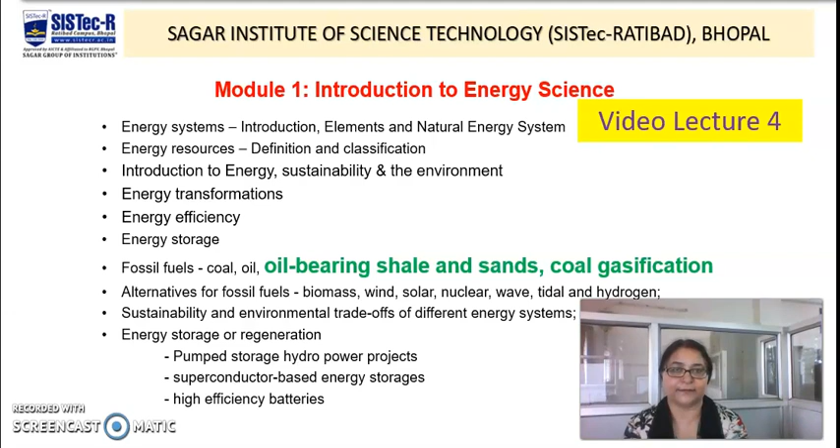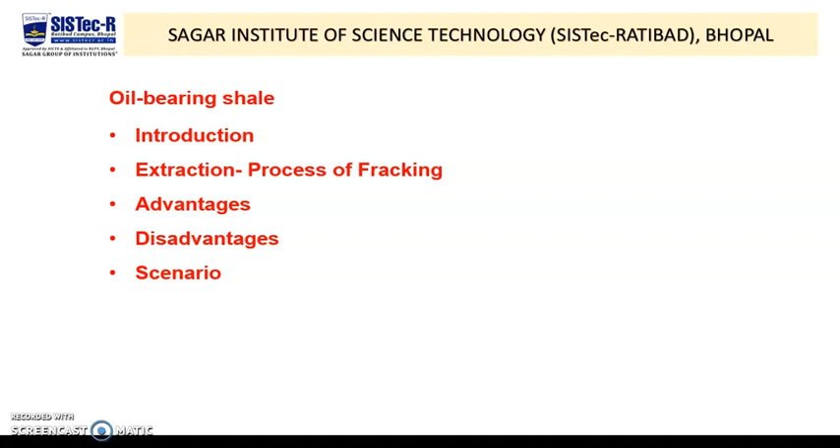Next topic is oil bearing shale. We will discuss its introduction, extraction, process of fracking, advantages, disadvantages and scenario. Now introduction. Oil bearing shales are underground rock formations that contain trapped petroleum.

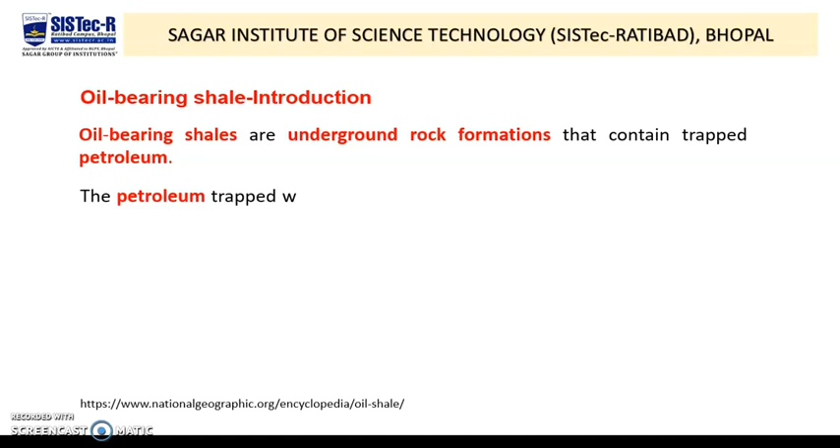The petroleum trapped within tight geological formations with low permeability and low porosity is known as tight oil and it is difficult to extract.

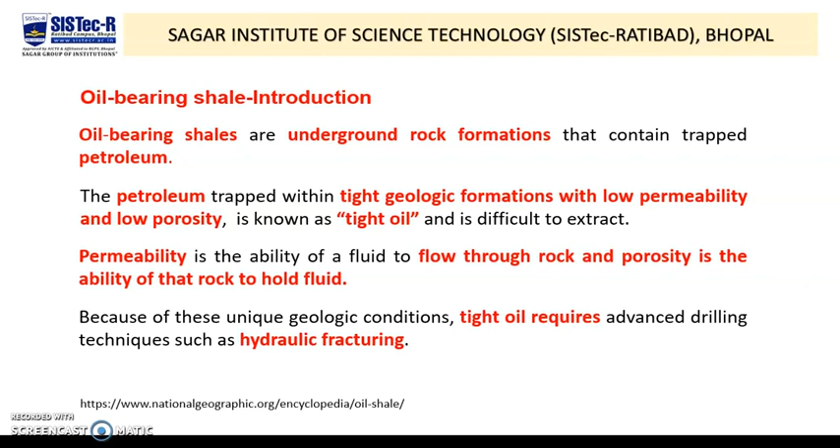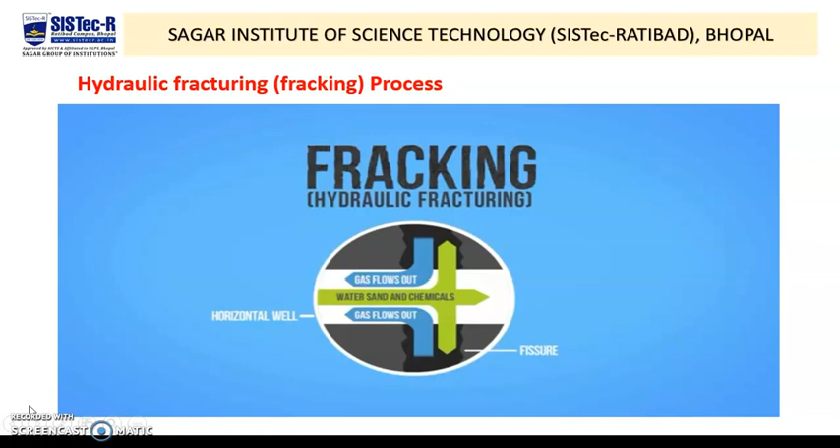Fracking. Hydraulic fracturing, or as it is commonly called, fracking, is a drilling technique used for accessing natural gas and oil in tight geologic formations. The process involves the horizontal, directional drilling of wells, as well as the use of water, sand, and chemicals at high pressures to fracture rock and release hydrocarbons. The hydraulic fracturing process can be summarized into the following steps.

A well is drilled vertically to the desired depth, then turns at an angle and continues horizontally for several thousand feet into the formation containing the trapped natural gas or oil. A mixture of water, sand, and chemicals are pumped into the well at high pressure in order to create fissures in the rock, which increase permeability and allow the hydrocarbons to escape. Natural gas or oil is released through the fissures and is drawn back up the well to the surface.

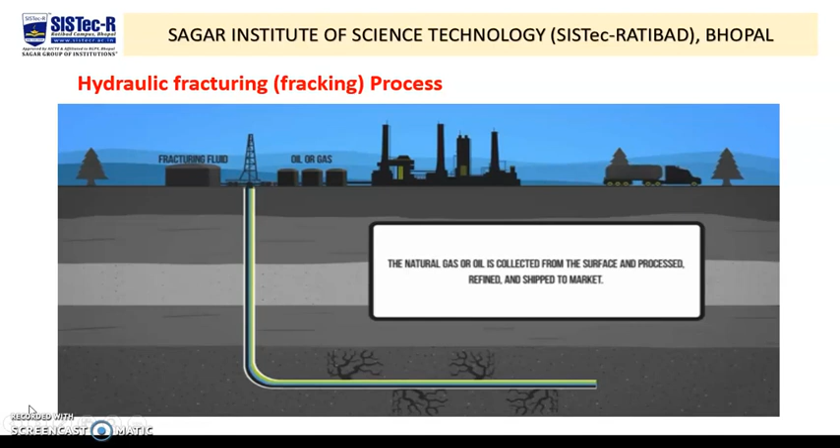Wastewater, also called flowback water or produced water, returns to the surface after the fracking process is completed. The natural gas or oil is collected from the surface and processed, refined, and shipped to market. Water and sand make up 98% of the fluid used in hydraulic fracturing. In addition, chemical additives are used, but the exact formulation varies depending on the well.

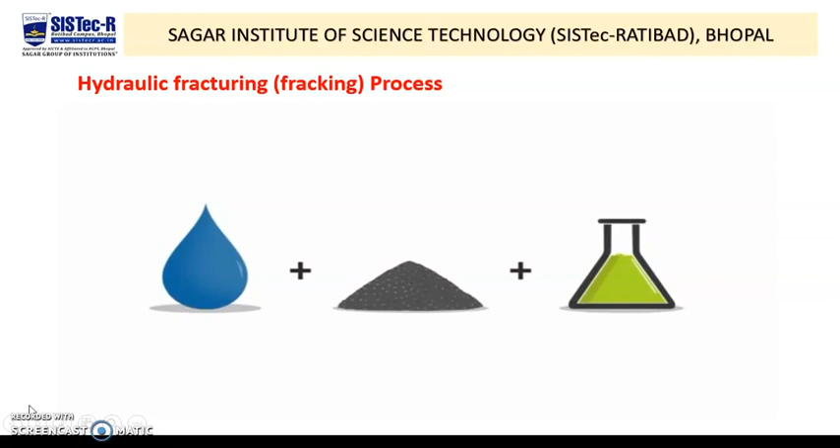Because of the advances in the fracking technology, oil and natural gas that were previously unrecoverable are now accessible. This has led to an increase in supply of both oil and gas in the world market and has meant greater energy independence for those countries, such as the United States, that can now access an abundance of these resources. However, the development of fracking has been controversial due to environmental concerns.

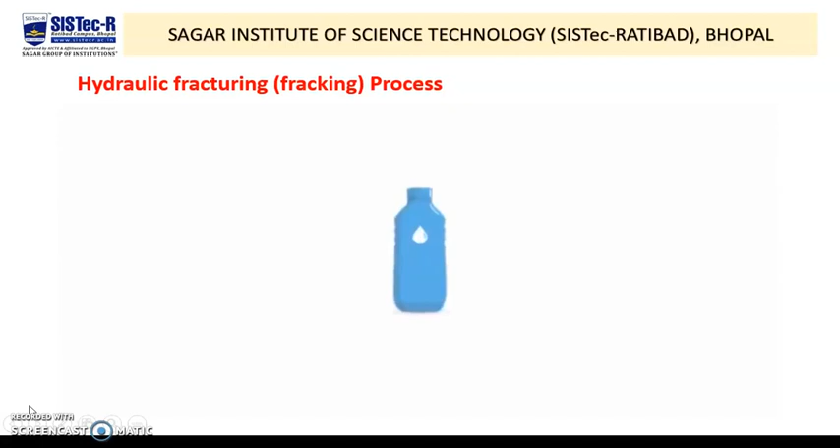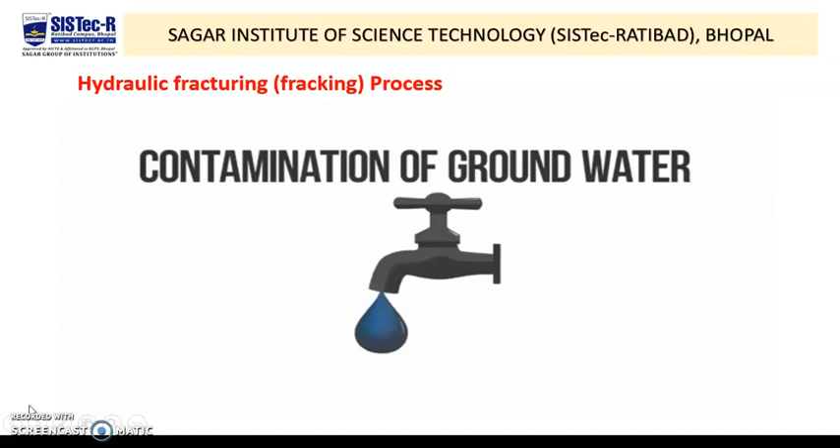The process typically requires 11 million liters of water per well, but can vary greatly depending on the characteristics of the geologic formation. Other environmental concerns include contamination of groundwater, depletion of fresh water, and surface pollution in the drilling process. There are also concerns linking fracking to enhanced seismic activity. That's fracking.

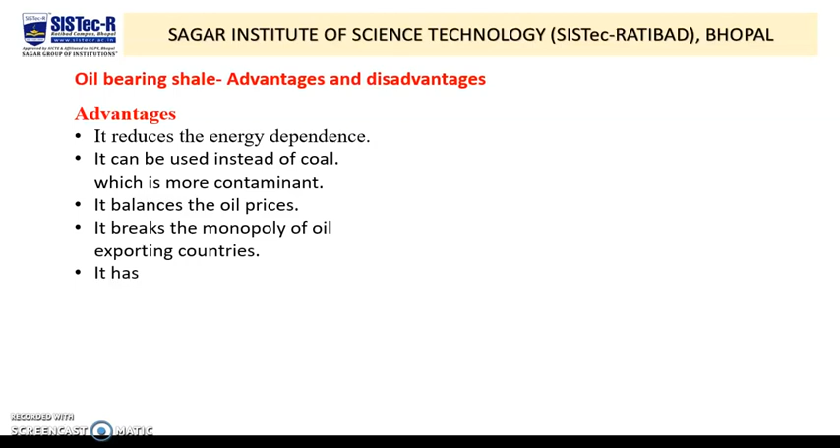Now, advantages and disadvantages of oil-bearing shale. Now, advantages. It reduces the energy dependency. It can be used instead of coal, which is more contaminant. It balances the oil prices. It breaks the monopoly of oil exporting countries. It has the power of providing employment. It has the power to improve the economic indicators.

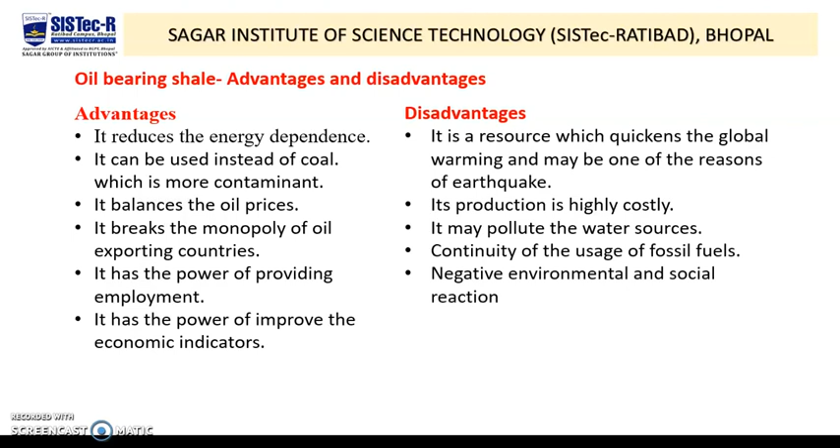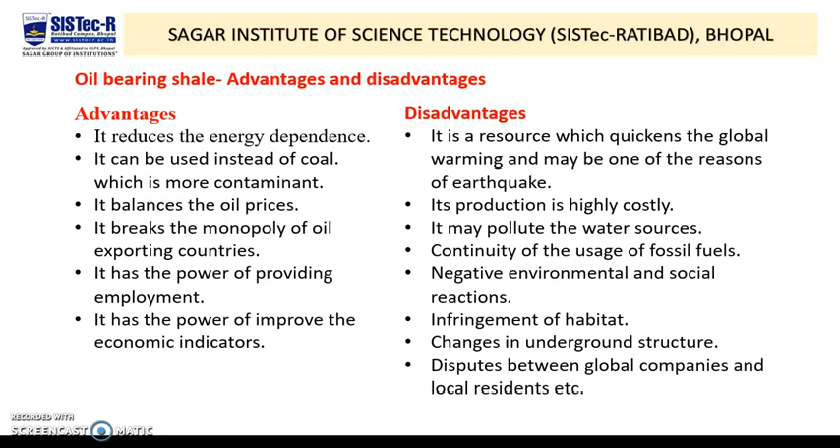Now, disadvantages. It is a resource which quickens the global warming and may be one of the reasons of earthquakes. Its production is highly costly. It may pollute the water sources. Continuity of uses of fossil fuels. Negative environmental and social reactions. Infringement of habitat. Changes in underground structures. These are the advantages and disadvantages of oil-bearing shale. One more disadvantage is here, disputes between global companies and local residents also.

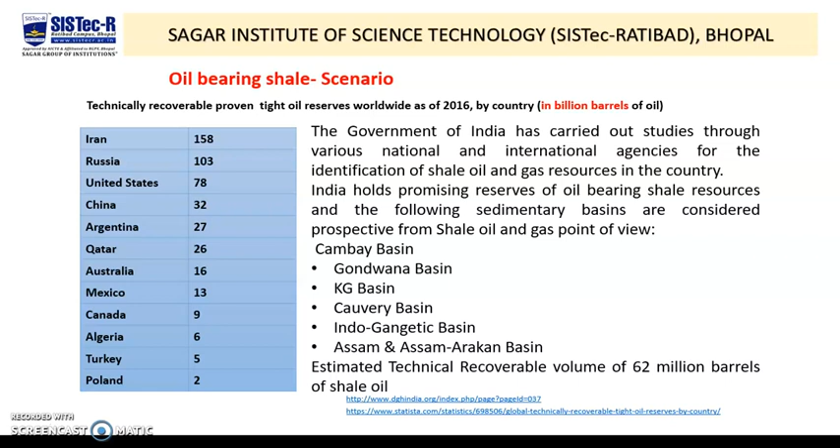The Government of India has carried out studies through various national and international agencies for the identification of oil-bearing shale resources in the country. And India holds promising reserves like sedimentary basins of Cambay, Gondwana, Krishna Godavari, Cauvery, Indo-Gangetic, Assam and Assam-Arakan basin. Estimated technical recoverable volume of approximately 62 million barrels of oil-bearing shale.

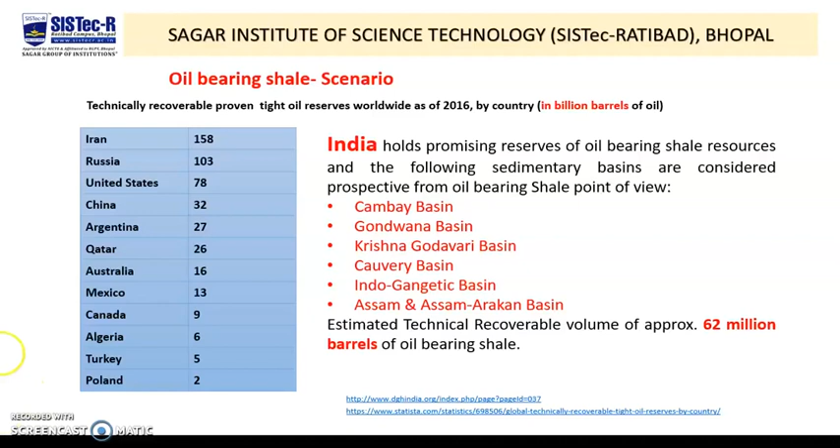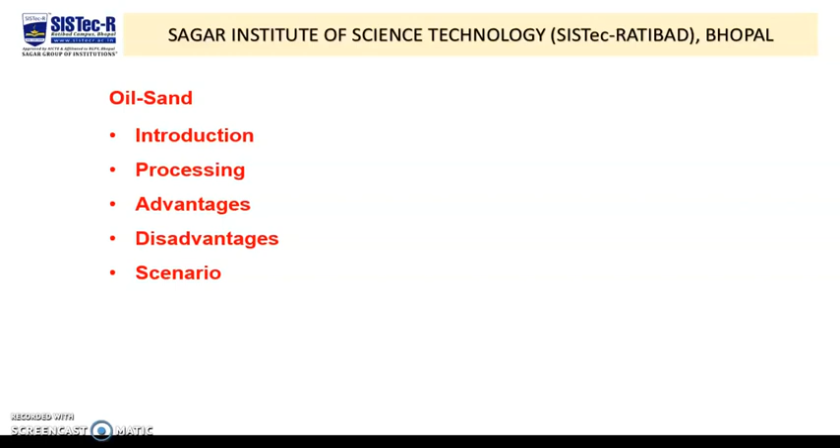Now, oil sand. We will discuss its introduction, processing, advantages, disadvantages, and scenario. Now, the introduction.

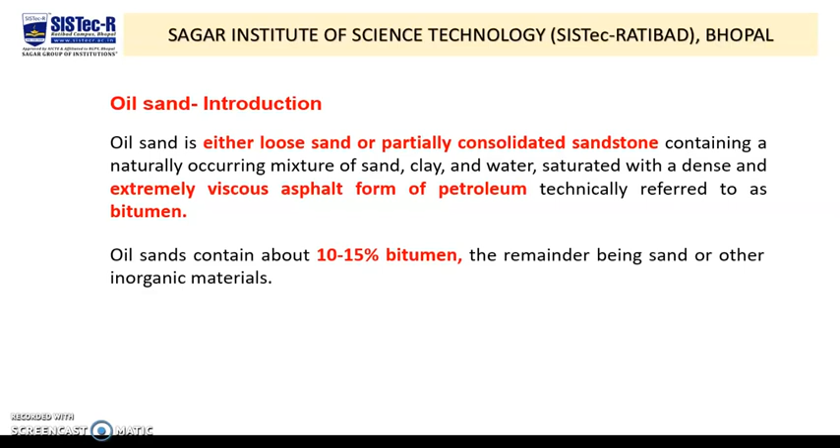Oil sands contain about 10 to 15% bitumen and the remainder being sand or other inorganic materials.

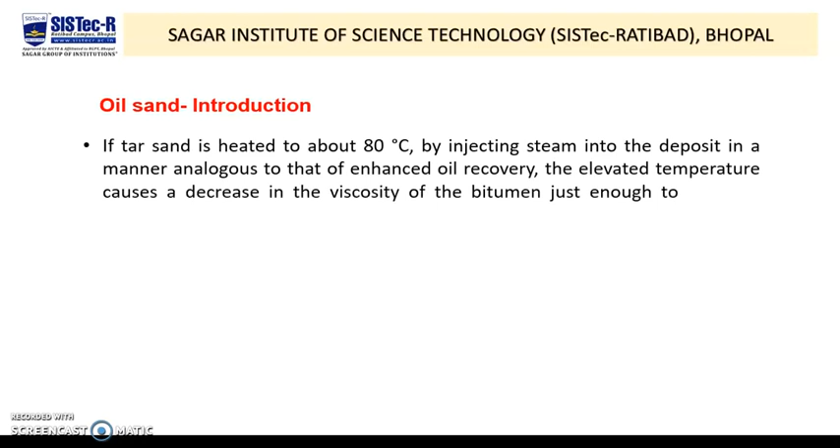Heating the bitumen above 500 degrees Celsius converts about 70% of it to a synthetic crude oil. Distilling this oil gives a good yield of kerosene and other liquid products in the middle distillate range.

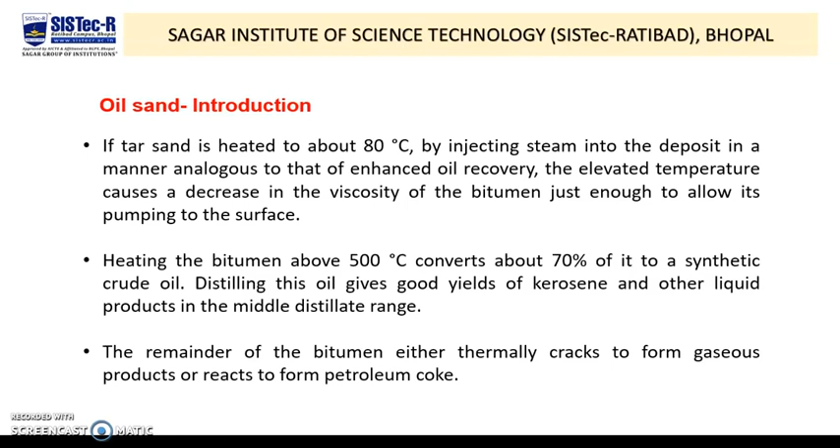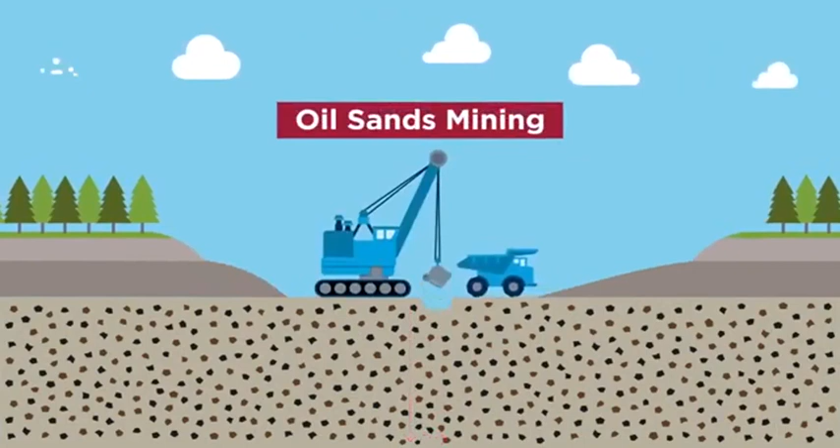Canada's oil sands are recovered using two main methods, drilling and mining. About 20% of the resource, known as bitumen, is found within 70 meters of the Earth's surface. These reserves, a mixture of bitumen and sand, are shallow and can be recovered through mining. Only 3% of the oil sands' total surface area can be mined. Oil sands mining is a three-stage process: mining, extraction, and tailings management.

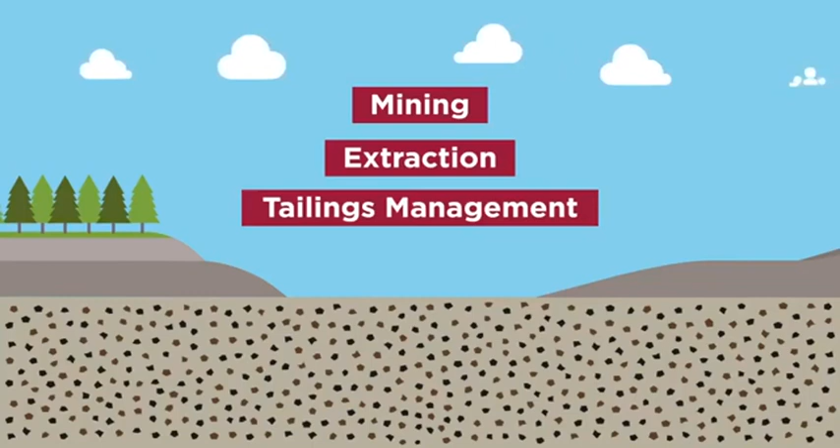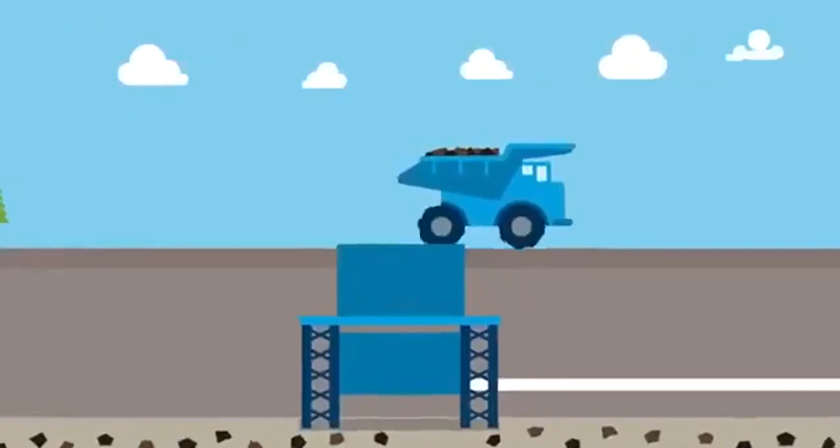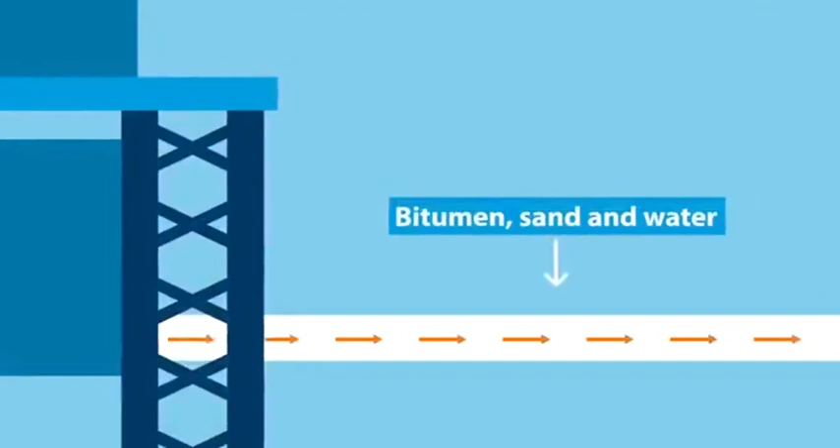Typically, in mining operations, the oil sands are scooped up by large shovels and loaded into heavy haul trucks. The trucks deliver their load to a crusher, which breaks down the large clumps of bitumen and sand in preparation for transport. There are several methods of transport. One is hydrotransport. Water is added, and this mixture is sent to the extraction facility by pipeline.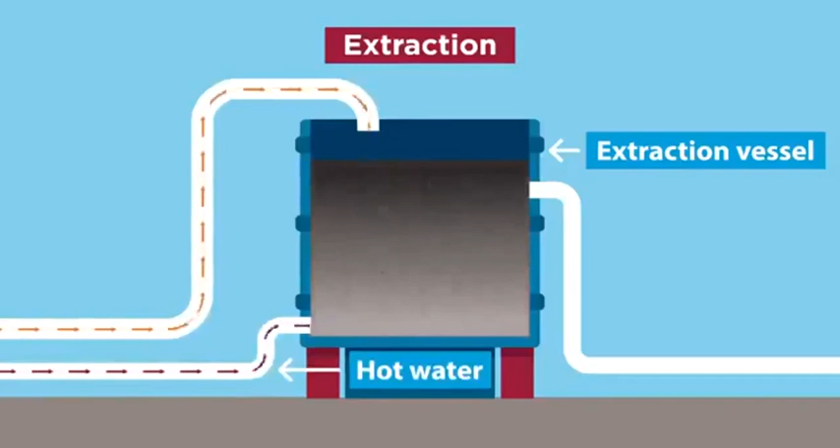During extraction, the mixture is fed into an extraction vessel to be treated. Hot water is added, which helps separate the bitumen from the sand. Gravity pulls the sand to the bottom of the vessel while the bitumen floats. Sometimes the bitumen goes through a second separation process to improve the quality. The bitumen is removed as a froth and is now ready to be moved to an upgrader or sent via pipeline for export.

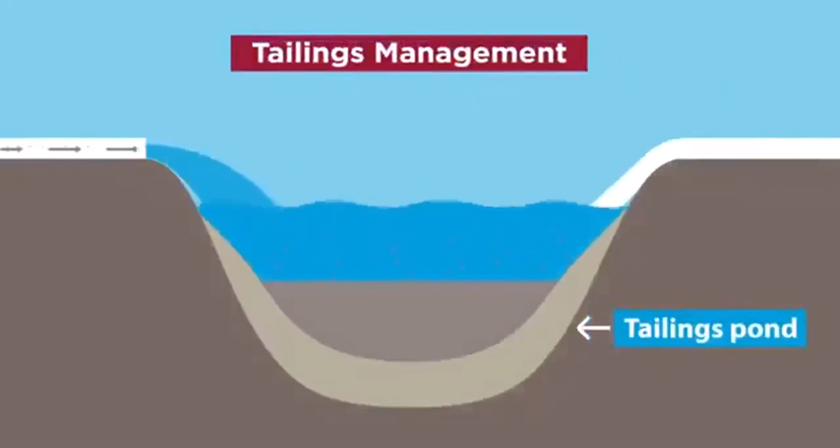Meanwhile, the mixture of sand and water at the bottom of the extraction vessel, also called tailings, is transferred to tailings ponds to settle and separate. As the solids settle out, the water on top is sent back to the mine to be heated and used again in extraction. Recycling water in this way reduces the amount of water needed for mining operations. All lands disturbed by oil sands mining operations, including tailings ponds, will be reclaimed to a self-sustaining landscape.

Bitumen is a valuable resource that can be refined into transportation fuels such as gasoline, diesel, and jet fuel. It can also be used by petrochemical plants to create everyday products like cosmetics, textiles, plastics, and lightweight construction materials.

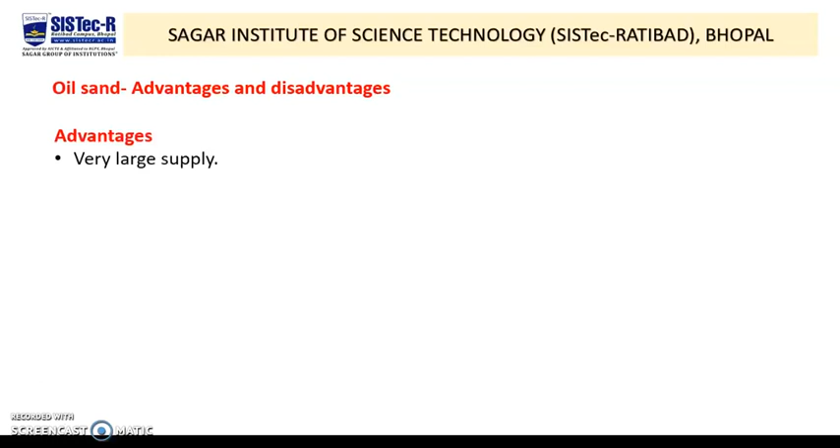Advantages and disadvantages of oil sand. Advantages: very large supply, it is available in abundance. Helps to keep oil prices relatively low. Enormous growth potential, less than 5% has been produced. Big economic driver for any country. Creates jobs for people and a stable resource.

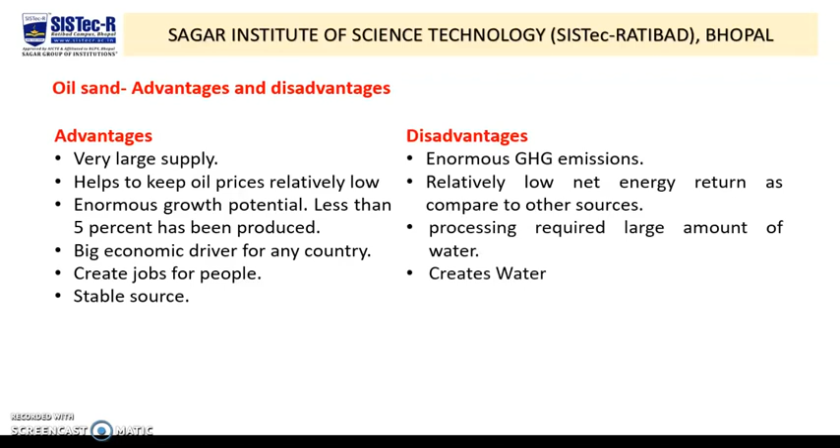Disadvantages of oil sand: enormous greenhouse gas emissions, relatively low net energy return as compared to other resources, processing requires a large amount of water, creates water pollution, destructive to forest, widespread habitat destruction, requires expensive and risky pipelines to reach faraway markets.

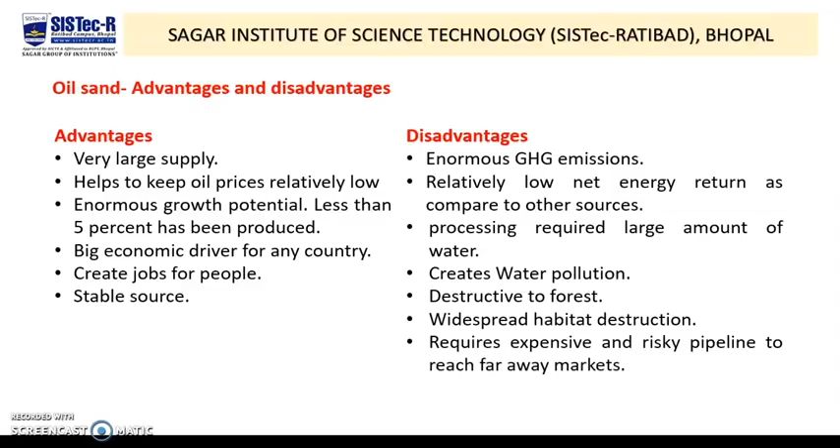Let's have a look at reserves of oil sand in the world. Much of the world's oil is in the form of oil sands, although it is not all recoverable. While oil sands are found in many places worldwide, the largest deposits in the world are found in Canada and Venezuela, and much of the rest is found in various countries in the Middle East.

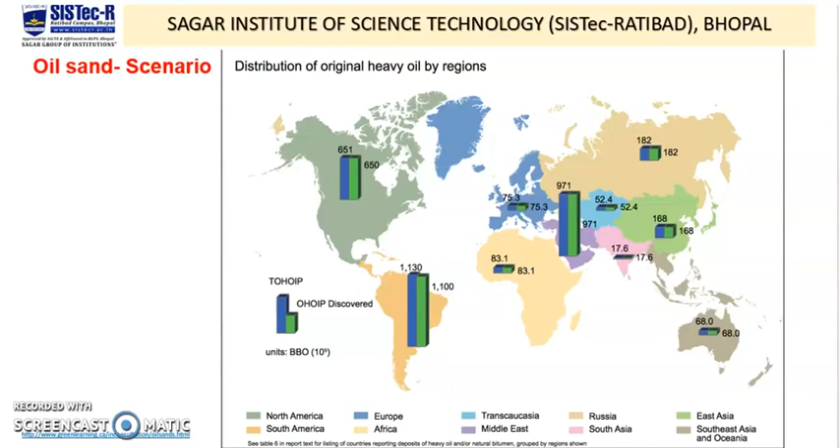Canada's oil sands are found in 3 deposits, the Athabasca, Peace River and Cold Lake areas in Alberta and part of Saskatchewan, with the greatest quantity found in the Athabasca region. Okay. Now the new topic is coal gasification.

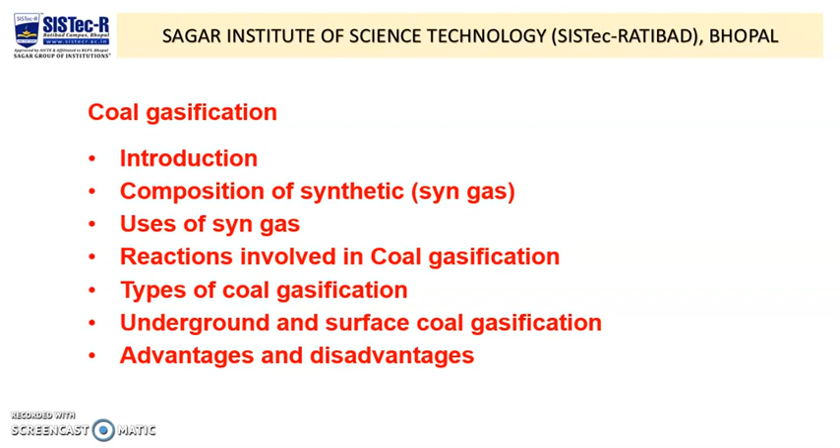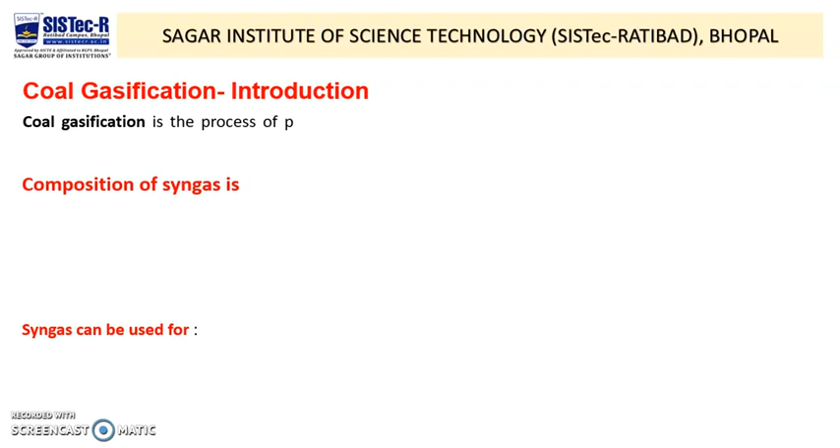Coal gasification is the process of producing synthetic gas. Synthetic gas is a mixture primarily of carbon monoxide, hydrogen, carbon dioxide, natural gas and water vapors from coal and water, air or oxygen.

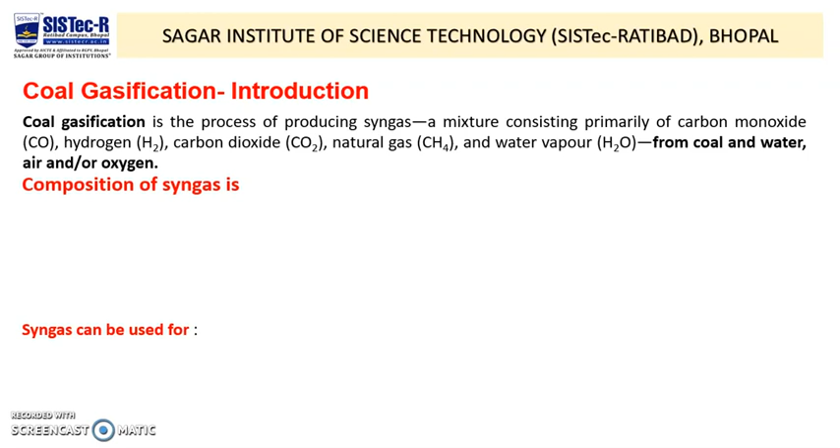Now the composition of synthetic gas. Synthetic gas consists of 30 to 60% carbon monoxide, 25 to 30% hydrogen, 0 to 5% methane, 5 to 15% carbon dioxide, plus a lesser or greater amount of water vapor, a smaller amount of sulfur compounds, hydrogen sulfides, carbonyl sulfides, and finally some ammonia and other trace contaminants.

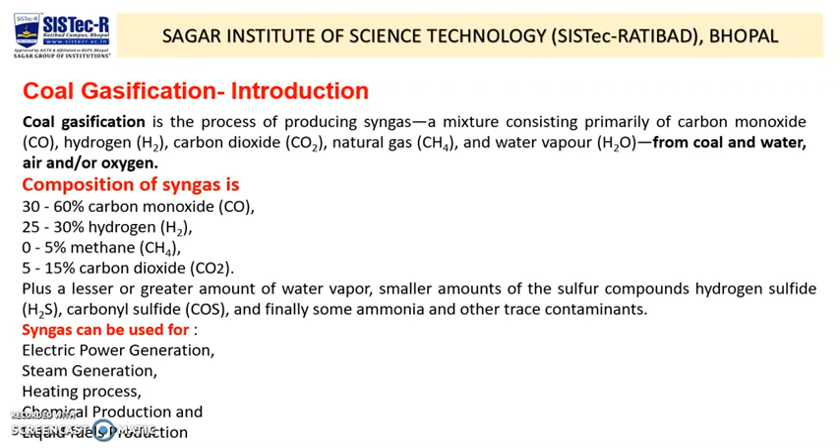Synthetic gas can be used for electric power generation, steam generation, heating process, chemical production, and liquid fuels production. Now reactions involved in the gasification process.

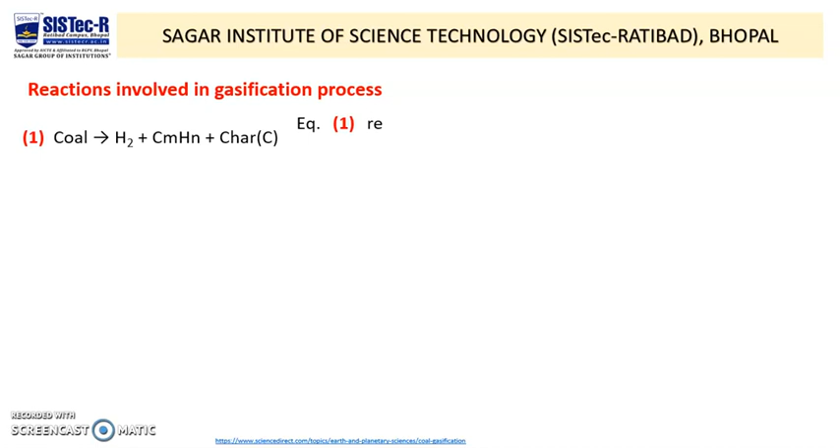The first equation represents the thermal decomposition of coal into volatile matter like hydrogen and hydrocarbon gas and char. Char is a residual solid content composed of fixed carbon and ash. Equation 2 indicates combustion with oxygen and formation of carbon dioxide. Equation 3 is a partial combustion with oxygen and supplies the heat of reaction required for gasification of carbon.

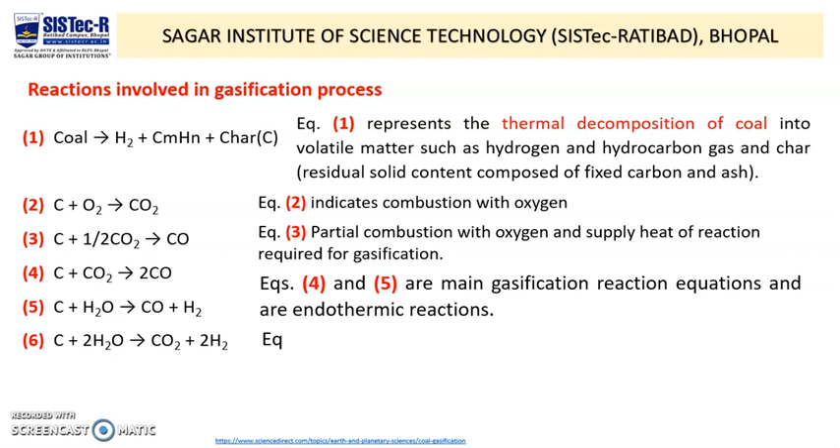Equations 4 and 5 are the main gasification reactions and are endothermic reactions. Equation 6 represents gasification with steam. Equation 7 is responsible for water-gas shift. It is the reaction between carbon monoxide and water. Equation 8 shows methanation or formation of methane.

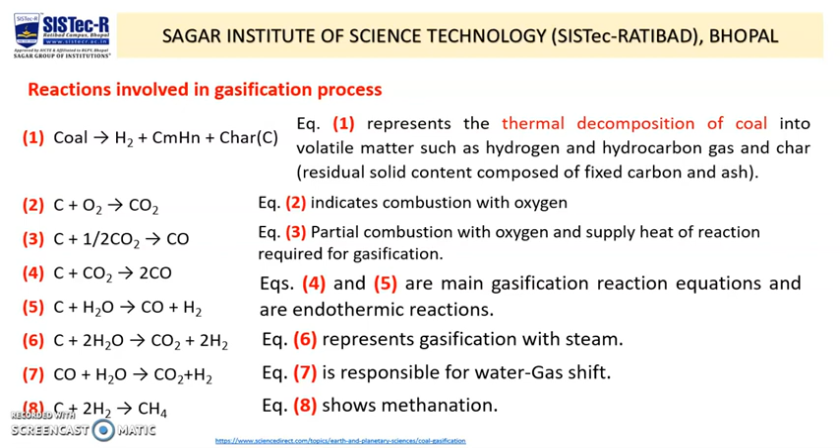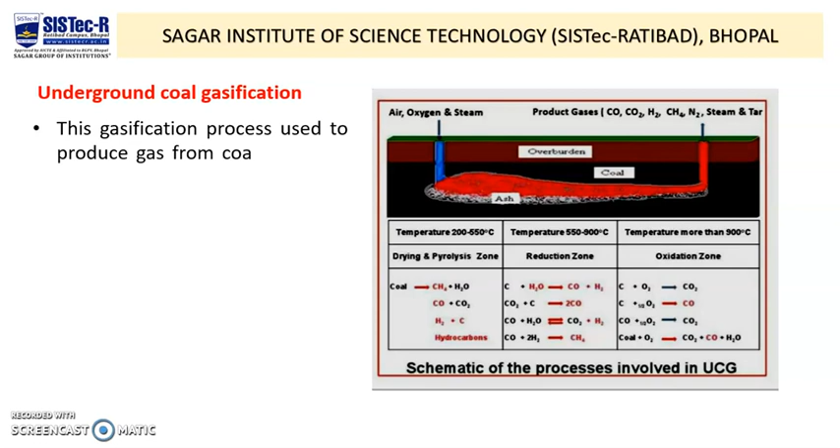Now types of coal gasification. There are two types of coal gasification, underground and surface coal gasification. Underground coal gasification. This gasification process is used to produce gas from coal in situ or on-site by injecting air or oxygen into non-mined coal seams and extracting the product gas via surface wells.

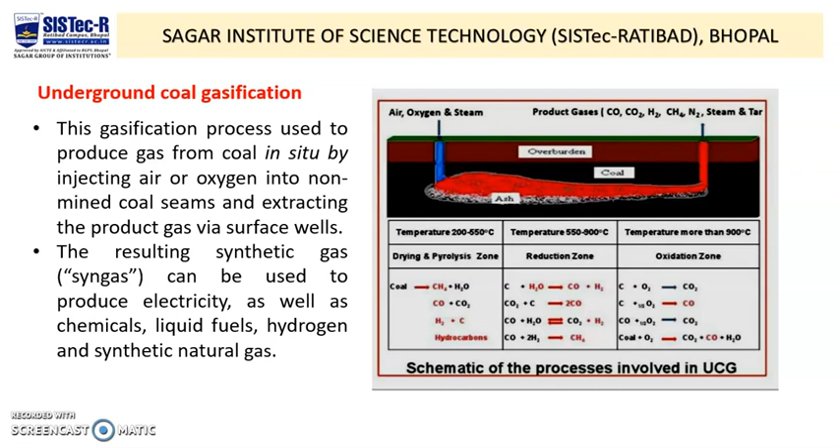The resulting synthetic gas can be used to produce electricity as well as chemicals, liquid fuels, hydrogen and synthetic natural gas. Let's have a look at the process of underground coal gasification.

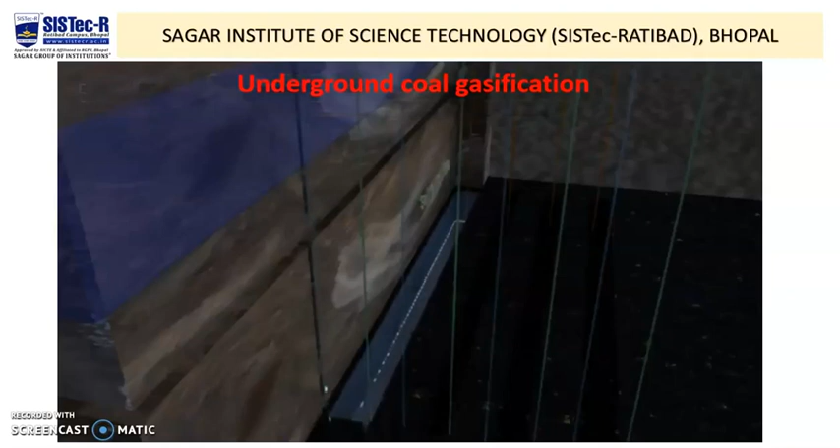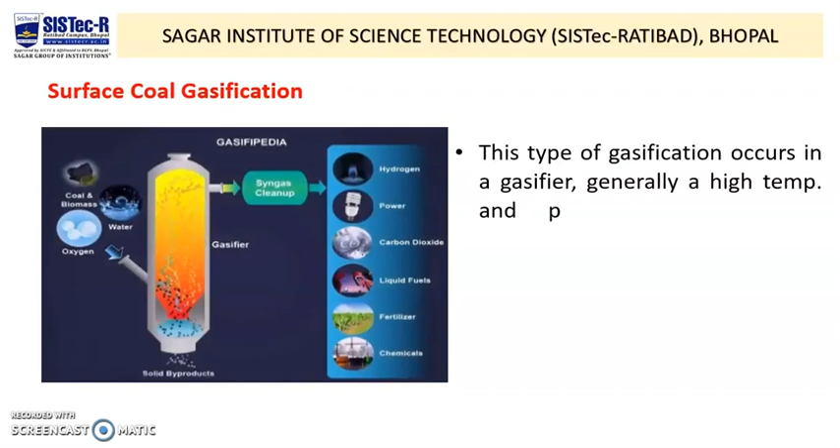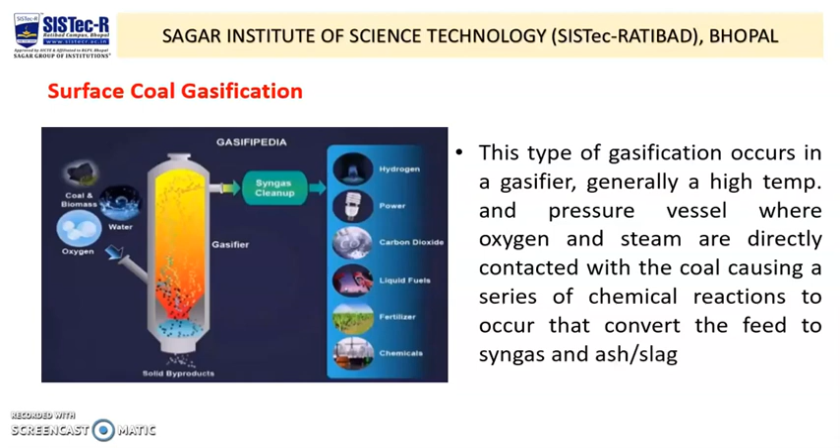Now, surface coal gasification. This type of gasification occurs in a gasifier, generally a high temperature and pressure vessel, where oxygen and steam are directly contacted with the coal, causing a series of chemical reactions to occur that convert the feed to synthetic gas and ash or slag. Now have a look at the process of surface coal gasification.

Let's take a closer look at coal gasification. Coal is fed into a vessel called a gasifier. In the gasifier, the coal is exposed to heat and pressure. Carefully controlled amounts of oxygen are released into the gasifier, allowing a portion of the coal to burn. This is called partial oxidation. The heat and pressure break up the molecular structure of the partially oxidized coal, causing a chemical reaction to take place. During the process, ash and other byproducts are trapped in the bottom of the gasifier and removed as slag or char.

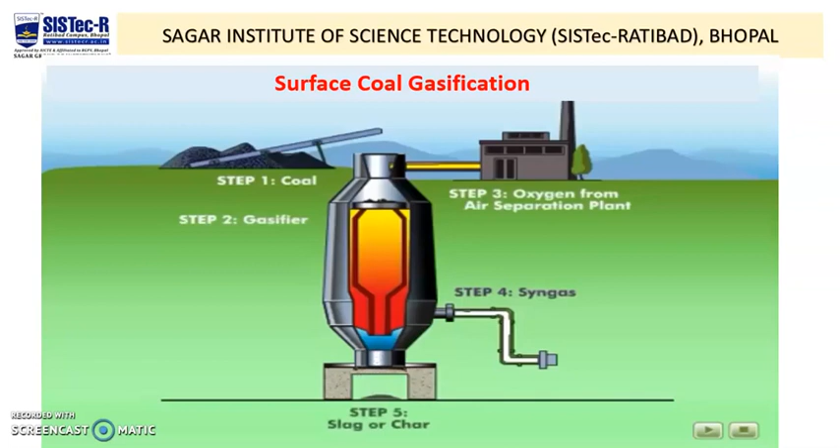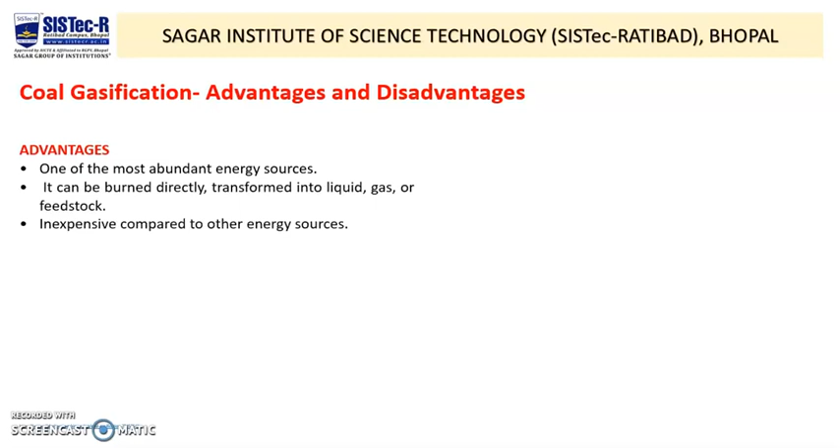Now, advantages and disadvantages of coal gasification. Advantages. It is one of the most abundant energy resources. It can be burned directly, transformed into liquid, gas or feedstock. Inexpensive compared to other energy resources. Can be used to produce ultra-clean fuel. Can lower the overall amount of greenhouse gases. It is a leading source of electricity nowadays. It reduces dependence on foreign oil. Byproducts of burning can be used for concrete and roadways.